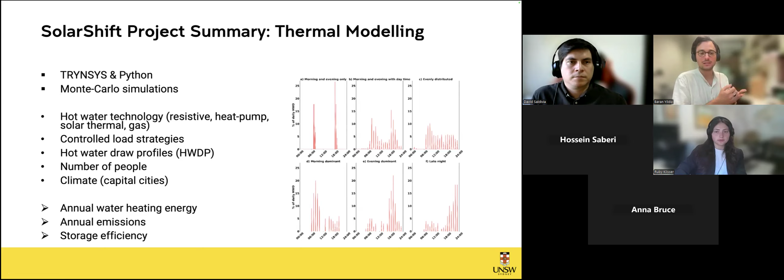We have modeled different number of people living in the same house, as well as climate of the household that you're living in, different capital cities. As a result, we're looking at annual water heating energy emissions, as well as the efficiency of the storage systems. So a couple of key results. According to our results, we have discovered that storage efficiency, which means the ratio of the useful water heating energy that you put out to the energy that you put in, is around 67 to 72%. So this is thermal modeling results by TRNSYS, and this has shown us there are significant energy losses from the tank due to ambient losses.

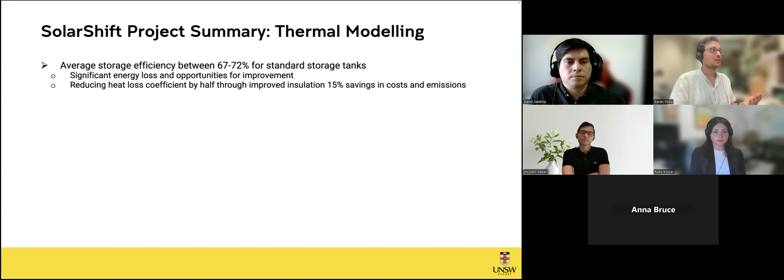Now, these are modeled with a standard tank, which David will mention the specifications. We believe that there are significant opportunities to improve here. And by simulating a more improved thermal insulation, we can achieve 15% savings in costs and emissions. We have seen that the heat pump average coefficient of performance ranges between 2.75 to 3.5. This is the base case for Sydney, also ranges differently in different capital cities. It is not only influenced by the ambient temperature, but it's also influenced by the water temperature in the tank. And we've found that heat pumps reduce emissions compared to a resistive system around 67%.

If we add a solar soak component for the existing control loads, because there are more hours where the circuit is energized, we've seen that energy consumed by the water tank increases by 4.18%. And similarly, if we change from the existing control load 1 to an exclusive solar soak heating, the emissions reduced by around 17%. This is for Sydney. We've modeled different hot water draw profiles to cater to different consumer habits in the household. And some of them actually give more predictable state of charge for the tank control. And we will explain this in more detail.

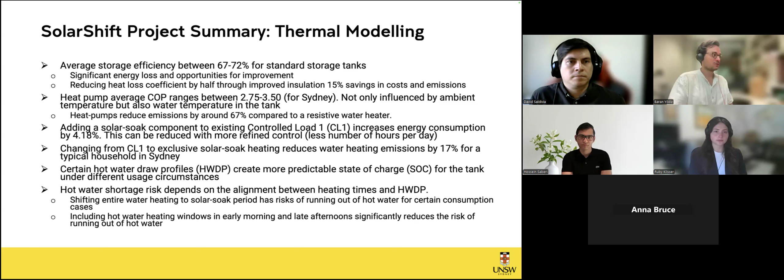We've also modeled hot water shortage risks based on different consumption profiles and climates, etc. And what we've seen is that if we shift the entire water heating to solar soak periods, there are risks of running out of hot water. Therefore, we recommend to have early morning or late afternoon heating to complement that. And that significantly reduces the risks of running out of hot water.

Now, the second part of this project is a customer hot water roadmap. And as the name suggests, this is a tool that we are aiming to make available to the public and households, where basically people will be able to see their annual electricity bills, net present costs over a 10-year period, and payback periods if they wanted to switch from one technology to the other. And similarly, these variables apply here, the thermal modeling variables.

And we're also considering the different tariff options, different state government rebates and incentives as well for different technologies. And as part of the customer hot water roadmap, these are a couple of plots here. Ruby is going to present this in more detail, but we can get the annual water heating energy cost for different technologies with PV or without PV or gas under different control load strategies, or on general supply, or with the timer or diverter, etc.

We can get the net present costs. We include initial capital costs, operational costs, connection, and daily supply charges, as well as the payback periods if we wanted to switch from one technology to the other. So these are the main outputs that households will be able to see.

So we've done a significant amount of work in this space, but over the next 6 months, we will be developing this into an online customer-facing tool where people can go and enter their unique household circumstance and get bespoke suggestions and recommendations, so they will be empowered and informed about their hot water choices.

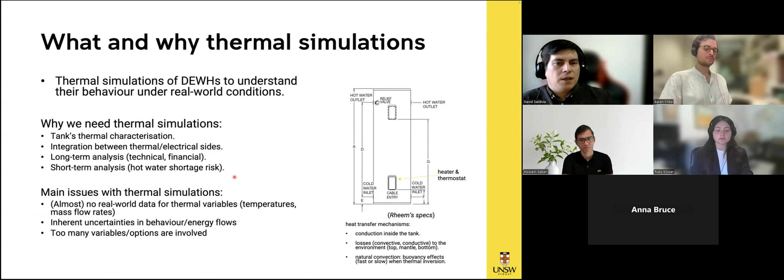And for simulations, when we say a simulation, we are talking about 4 steps. We have the settings, where we define the household location, the occupancy, the behavior, the system they have, if they have PV or not. Then we have a time series generation step where we generate the time series that we will use for the simulations. We run the simulations and get the output, and depending on what type of output we are looking for, we can have different post-processing. I will focus a little bit more on the generators, where we get the data from, and the models in the next slides. Next one, please.

So I want to show what we have implemented. In terms of time series generator, we have included the hot water draw profiles. We are using 6 different hot water draw profiles based on previous research; these profiles were compiled in previous research. We have the typical household profiles. For example, the typical one where we have hot water in the morning and in the evening only. That is the first one.

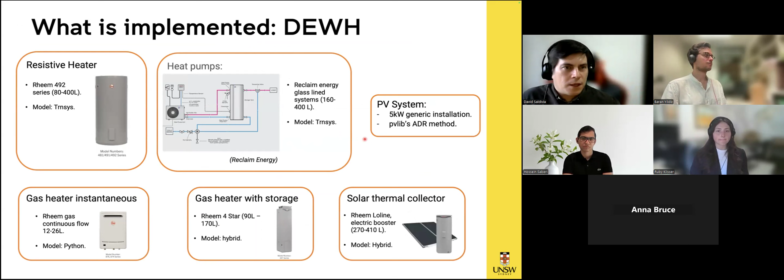And going to the results, we are considering a base case for a typical household in Australia in Sydney for 4 people. The other specifications for the tank and heaters are there. And for the different technologies, we have the specifications for the resistive and the heat pumps. And the variables of interest in this case are the storage efficiency, the state of charge at each moment, the annual emissions, and the hot water shortage risk. These are the technical parameters. All of the financial and cost will be covered later by Ruby.

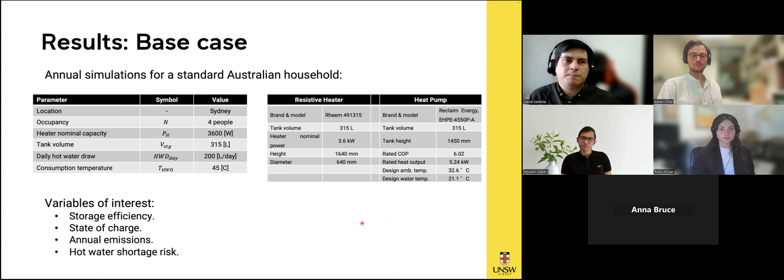Next one, please. So here we have results for the resistive heaters. On the left plot, we have the storage efficiency. On the right plot, we have the annual energy consumption. The x-axis are the different control strategies, and the different colors represent the different hot water draw profiles. So we have a storage efficiency between 65 to 70%, and the annual energy consumed is around 3,000 kilowatt-hours per year.

The whole bar is the total energy provided by the heater, and the red line is the energy consumed by the household as hot water. And the percentages there are the energy increase if we move from control load 1 to the other alternatives. And we can see here that the control strategy has higher influence than the hot water draw profile over the storage efficiency, as we can see on the left.

These are annual results, but we can have also detailed results. For example, on the bottom left, we have the first 3 days of simulations with the different temperatures. And with that temperature, we calculate what is the state of charge. I will talk a little bit about the state of charge at the end of my presentation. Let's move to the next slide, please.

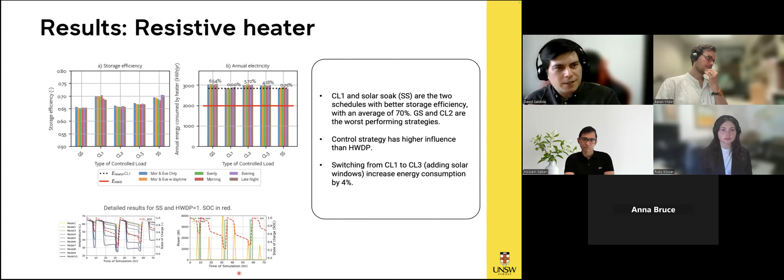We have the results for the heat pumps. We have similar results in terms of annual energy consumed and storage efficiency. Similar results in terms of annual energy delivered by the heat pump compared with the resistive, but the energy consumed is actually way lower because, as we know, the heat pumps consume less energy than the heat that they provide.

And the solar soak and control load 1, that is the nighttime, are the best performing ones. And the reason for that is because they have a lower number of hours in the heating period. And that means the temperature in the tank is relatively lower, reducing the heat losses. And because this temperature is lower, the heat pump operates closer to the design point. What is important here is the design point for the heat pump we are simulating.

The COP of a Reclaim Energy heat pump is 6, but the results show an average of around 3, and that is because we are operating far away from the design point.

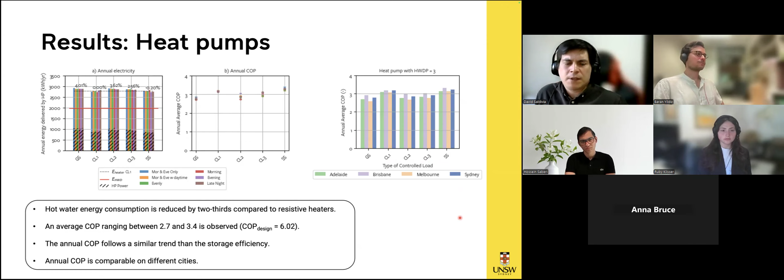We wanted to check also what's happening in different cities. So on the plot on the right, the color represents the cities, and we see that the different cities have the same trends. And again, the control strategy seems to have a higher influence than the city, and the city's influence is given by the ambient temperature. So it seems that the control strategy has a higher influence than the ambient temperature in this case.

Next one is regarding the emissions. As I said, we imported emissions from the grid from NEMED for the different Australian NEM regions. So here we are presenting the result for the resistive heaters and the heat pumps. Again, the colors represent the different cities. So the main result here is if we want to reduce emissions, the best option is moving from resistive to heat pumps, 67% of reduction on average. If we cannot do that, the NEM region is really important. So Adelaide, for example, has 20% of the average emissions of Melbourne, and that is because of the grid's composition.

But the third option is moving to the middle of the day and switching from the CL1 on to solar soak. In this case, at least for Sydney, it represents a 17% reduction. Similar reductions are found in the other states as well.

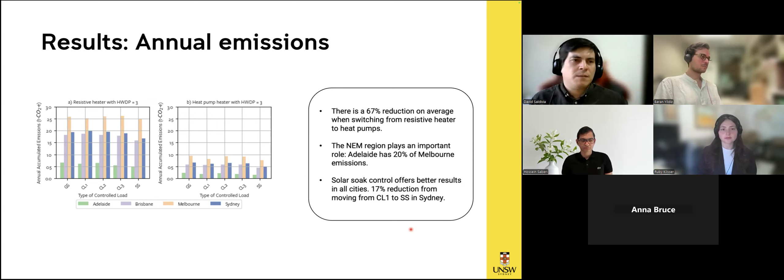And next one, please. Regarding the Monte Carlo simulations, so far what I have presented is the long-term analysis, like in the long term, which alternative is better. But in the short term, from the household point of view, the interest is, for example, to avoid running out of hot water. So if we want to estimate the hot water shortage risk, we need to analyze what happens on the next day, for example. So for that, we used Monte Carlo simulations.

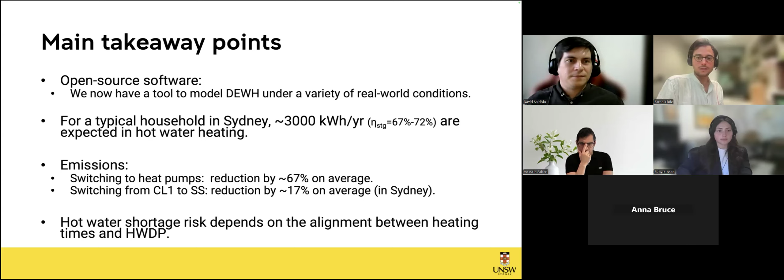Thank you, David. Ruby.

Yes. So are we talking about the customer hot water roadmap? Next slide, please. So the goal of this roadmap is to assist customers with understanding all of the different water heating and control strategy and tariff options available to them. The roadmap will consider a lot of different variables, including different water heating systems, households with and without PV, different tariff options, control strategies, usage patterns, any associated costs, savings and rebates depending on a household's location and size.

Next slide, please. The way that we've gone about the approach to this roadmap is using David's thermal modeling to get the performance data and the operating costs for the different water heating technologies paired with research data. So we get the water heater specifications from the different manufacturers, and then the supply and installation costs from different retailers. We get the tariff data as an average from AGL, Origin, and Energy Australia rates,

and any rebates from the government for state-specific rebates as well as national rebates, to output the financial analysis where we get the annual water heating bill, the net present costs, and the payback period for the different technologies. Next slide, please.

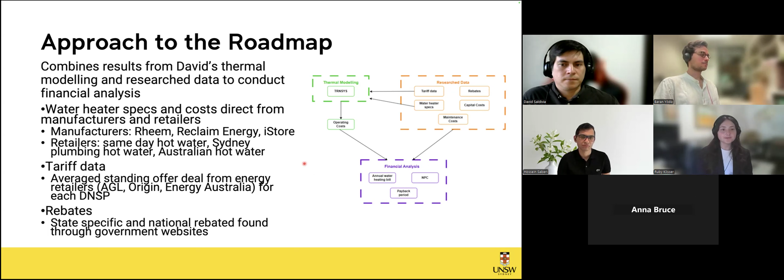So for this analysis, we have a lot of different assumptions, and there's more details available in the appendix if there's more assumptions that you want to look into later. But the main ones are that the control strategy is modeled with self-consumption, which, as Baran mentioned earlier, isn't currently possible as they're set up on different circuits, but it shows a possible case in the future where switching between these circuits is possible.

We also look at the solar feed-in tariff, which we consider as the missed opportunity cost when solar energy is used by a water heating system rather than exported back to the grid at the solar feed-in tariff rate specified by energy retailers. And then for the daily supply charge, we don't include the daily supply charge for all electric systems because we assume households will be linked up to electricity regardless of their water heating system.

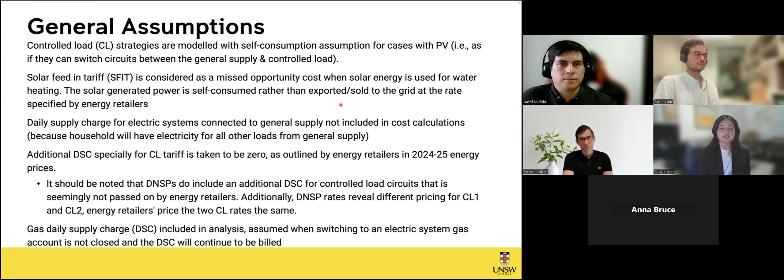And then specifically for controlled load tariffs, the DNSPs have an additional daily supply charge for controlled load systems. However, that's not passed on by the energy retailers, so we haven't included that in the pricing for this analysis. And with gas, we do include the daily supply charge because maybe it is just for water heating, and we've assumed that if a household were to switch to an electric water heating system, they'd still incur that gas daily supply charge and they wouldn't close their gas account. And so those are the main assumptions.

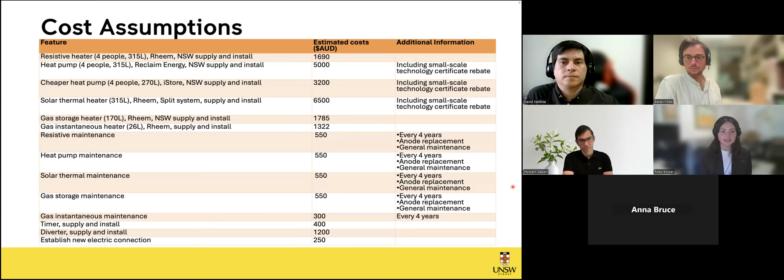Next one, please. These are the cost assumptions. So for all of the technology, supply and installation costs, we researched that from different retailers. And then from industry discussions, we've put together what we think the maintenance costs would be for all the different water heaters. So we've said that's around every 4 years, and for all the systems with a tank, that would include a full anode replacement as well as general maintenance. So yeah, next slide, please.

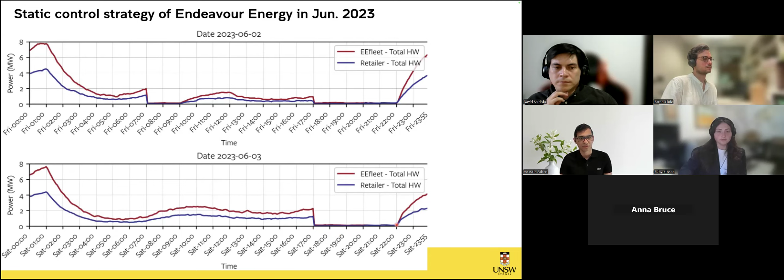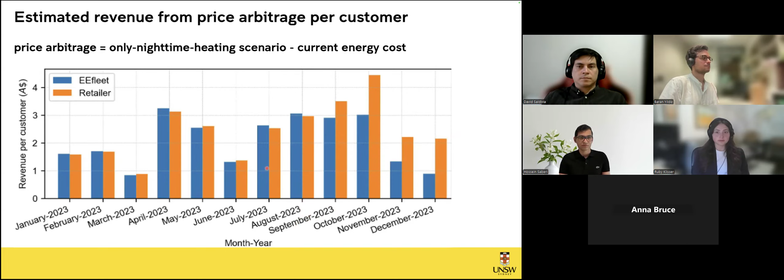As we can see, during the different months this benefit can change. It depends on the amount of load being shifted to daytime, and also the difference between the energy price of the daytime and nighttime. But the point we can observe is that from September, and especially in October onwards, the retailer has been more significantly gaining benefit from this price arbitrage. Especially in December, the difference is more than twice compared to the default CL3 of Endeavour Energy.

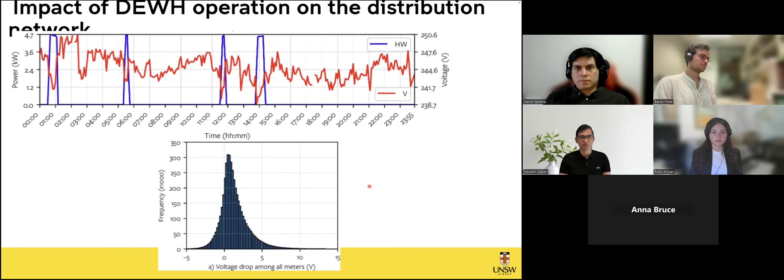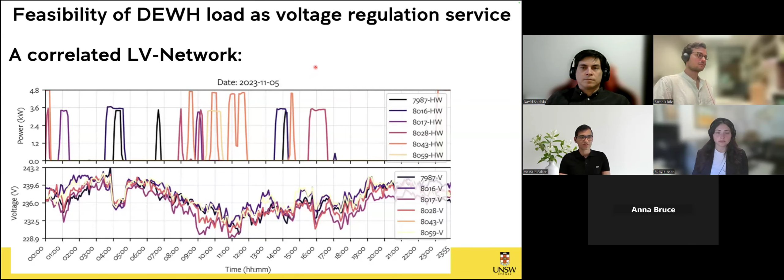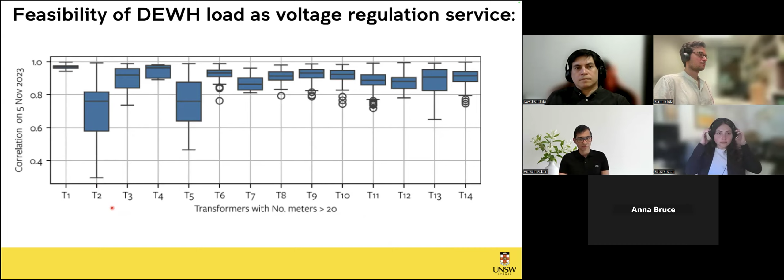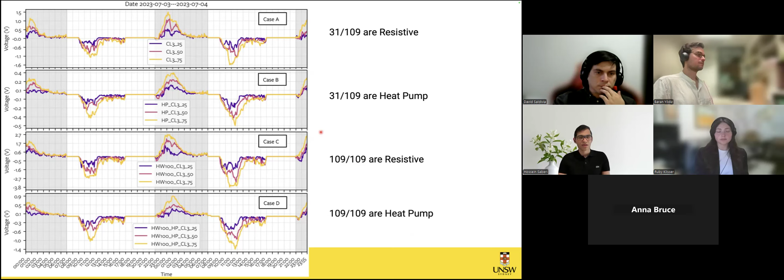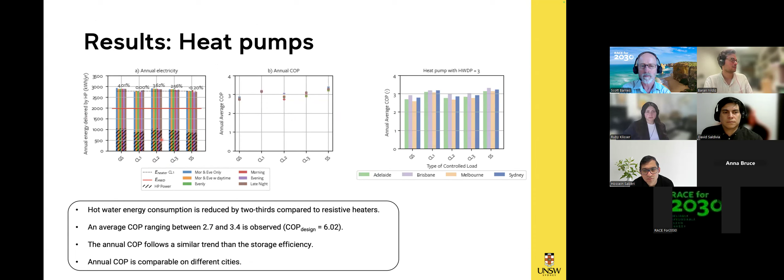So, Gareth, basically, as David presented here, and David, please correct me if I'm wrong on this one. This red line is the useful energy as a hot water service, and this is the total energy that is consumed by the water tank. And so the proportion above this bar is actually the heat loss, right? And there are different heat losses on different control load strategies. And we've also shown this for the heat pump technologies as well, due to COP. It's much less what they consume versus what they deliver here.

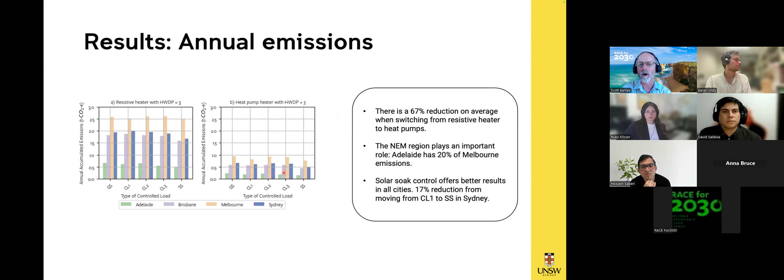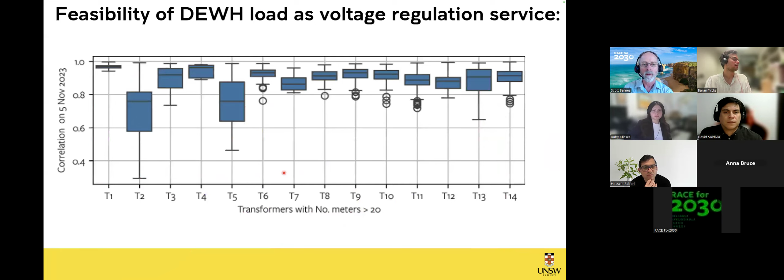Yeah, so exactly, hot water demand is higher during winter due to lower temperature. And so you're asking what percentage is actual higher water usage versus what percentage is to bring that lower mains temperature to the ideal temperature. I understand your question. And the loss of heat, standing loss as well, because you're looking at the power consumed, not at the hot water use, but you're inferring a water use from the power.

No, I understand. So from the real world data, it's difficult to infer that, but from our thermal modeling software in TRNSYS, we can easily do that. So that's our answer. But David, would you have any opinion from your simulations? If you have time series simulations, maybe we could look into this in more detail and let them know later on. We have the mains temperature, we have the ideal water temperature, we have the usage pattern. So if you know the answer, please further elaborate.

So we didn't present disaggregated data for seasons, except by the hot water shortage risk I showed, which I think I didn't mention during the presentation, but that is for a critical case in July, a typical day in July. So that is for the winter season. In that case, we focus mostly on that critical period of time. But we didn't present here the disaggregation for each season.

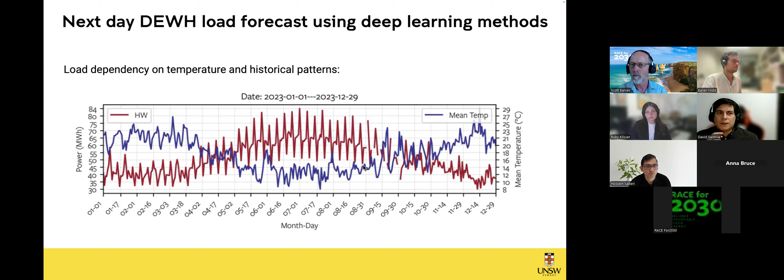Yeah, so that is one of the challenges. We want to shift energy, but we have shown in this hot water shortage analysis that there are critical points where we need a top-up charging. So the problem with that is, to avoid hot water shortage risk during night, that top-up window cannot be too long, because otherwise we will be heating the water mostly during night. So we didn't get to the point to add an additional window in this analysis, but it's definitely something we can look at.

It could be interesting adding that, David. I have another comment, Scott. Sorry. Yes, so this is a very interesting and important question. When you are controlling this amount of large water heating systems, and also wanting to minimize the risk of running out of hot water, it's tricky. Now, what I can tell you, Jay, is what I've seen from different trials across Australia.

With these new controlled loads with the solar soak component, different aggregators seem to work with 7 to 8 hours of on periods per day. So 7 to 8 hours where the circuits are energized, and they allocate 2 to 3 hours of this 7-8 hours to the early morning period, say 4 to 6 or 5 to 7. And with these statistics, there seems to be a very low number of complaints.